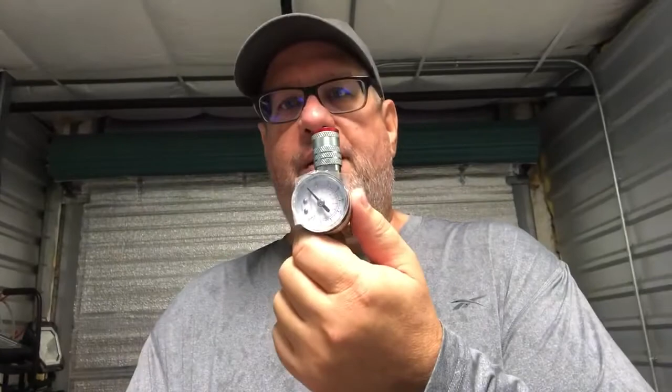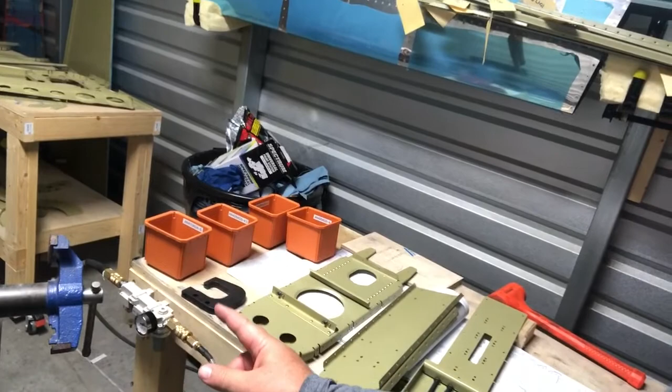I've got a sinking suspicion that the gauges on my bench, and these guys down there, you guys get the drift, aren't working correctly. So I'm gonna calibrate some things here before I continue. These pneumatics should go no more than 90 pounds of pressure. The squeezers have leather seals, and if pressure's above that, you'll blow those seals. It's just too much pressure. So I'm going to get that dialed in correctly, and then we'll go from there.

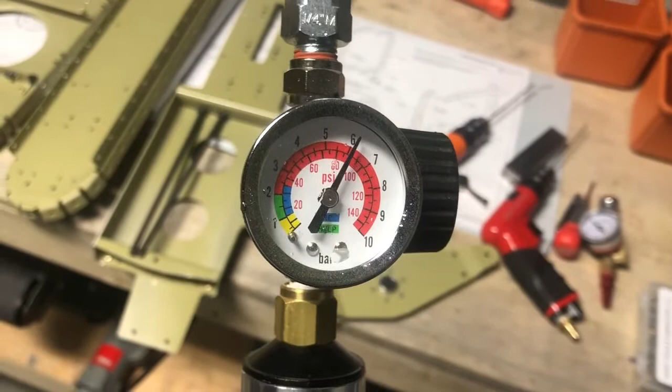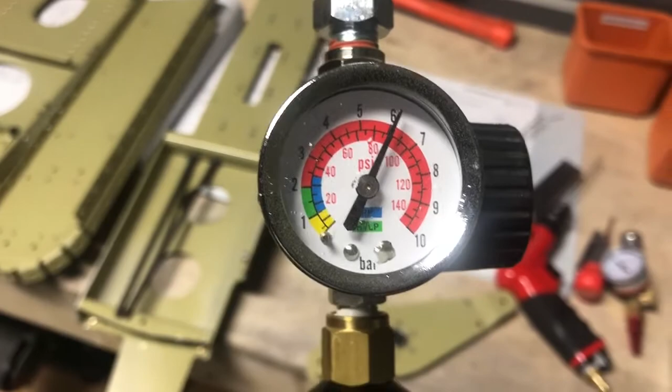So as I suspected - well, actually I didn't suspect, I gotta get this right - the gauge on the compressor is actually lining up right with my gauge here, 90 and 90. So I don't know what is going on. What I'm going to do is plug this into the regulator here and see what we get there. But yeah, these are lining up, they're calibrated. I trust this gauge here a lot more than any other gauge. This is a nice one, very precise.

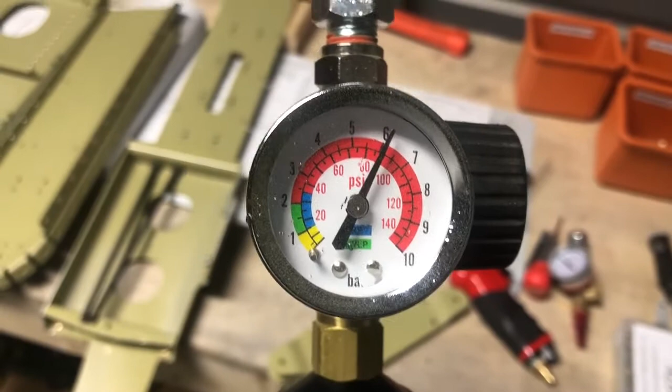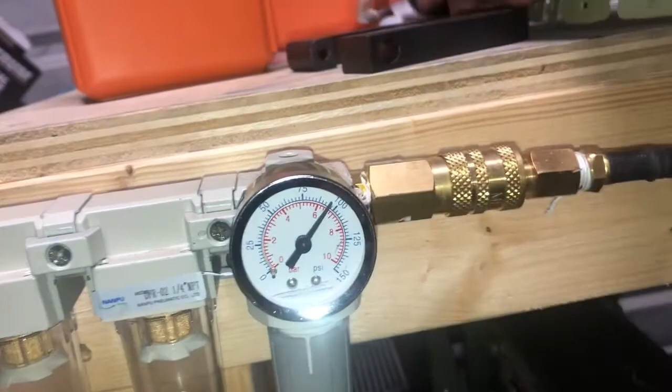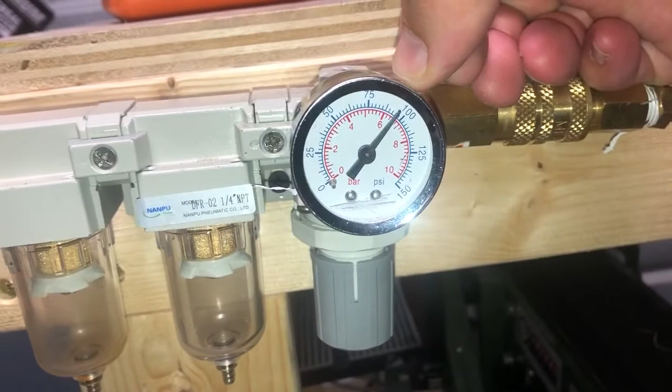So let me put it onto the bench and calibrate those as well. As I suspected, this gauge reads 90 here, and I trust this one. So this other gauge is about 2 to 3 pounds off. Not bad, actually I was shocked. So I'm now trying to figure out what the heck - this gauge is reading about 2 to 3 pounds of pressure high. Different line, comes out of a different side of the compressor. So let me disconnect this.

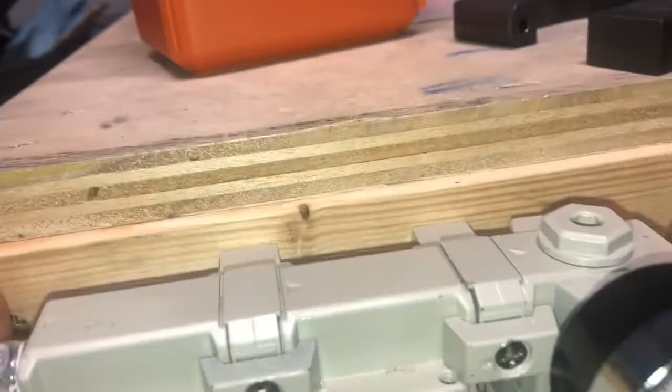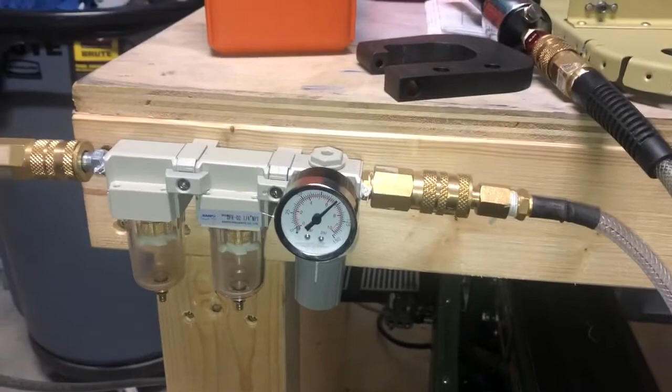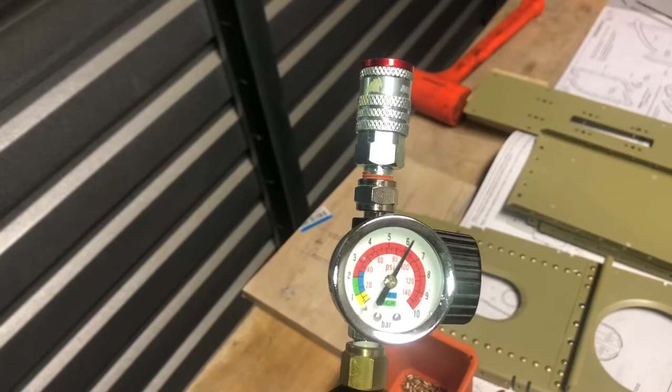Let me disconnect it and hook the gauge up to it and see what we're reading. Yeah, we're dead on this one as well. So these gauges are reading about 5 pounds of pressure high, which I don't get. I don't understand why I was over pressuring, because the settings were set to 90 pounds. Don't know, maybe atmosphere, all us pilots out there. I doubt it because it's a closed system. So it's really bizarre that I was shearing those pins like that.

What I'm going to do is keep this gauge hooked up to one of these lines. I got an air leak too, I got to fix that. I got 2 lines that feed into this room, so I'm going to keep this gauge hooked up and see if the pressure increases or decreases when the system runs. It might overpressure, I don't know. But I'm going to keep this hooked up and monitor it, and I'll let you go.

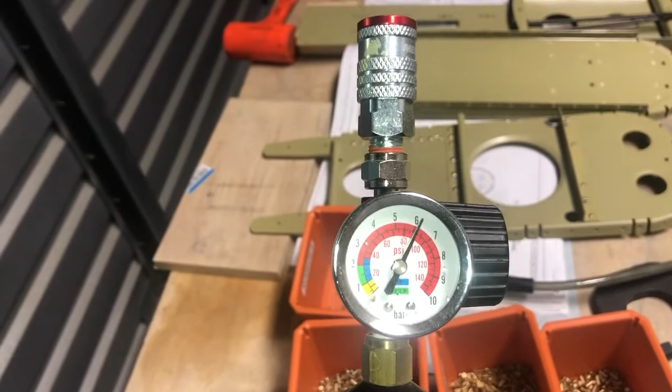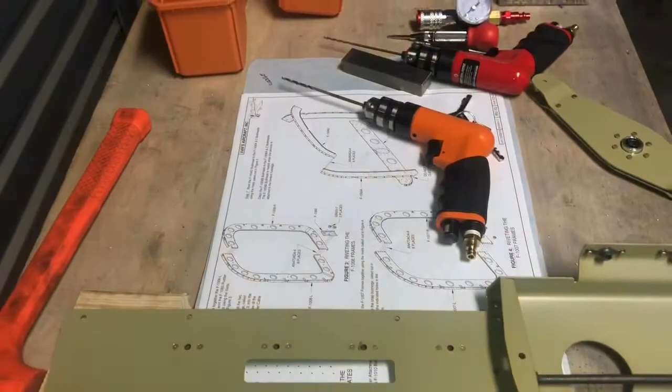But it's very important that you get your pressures right. You do not want to go over 90 pounds of pressure on these tools unless they're rated for that, but most tools are 90 pounds max. So we're going to continue on. Like I said, I've got to get the rest of the bulkheads riveted together, and then we'll soldier on, do what we got to do.

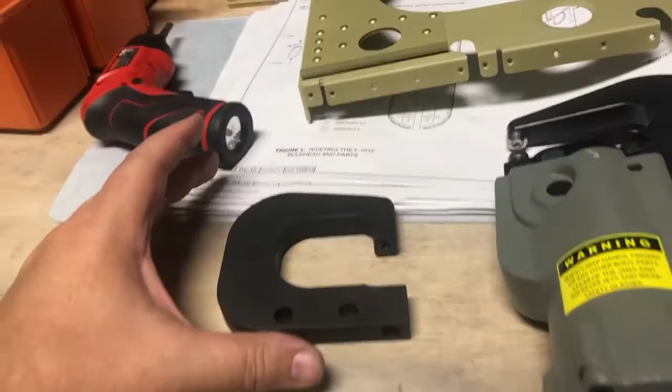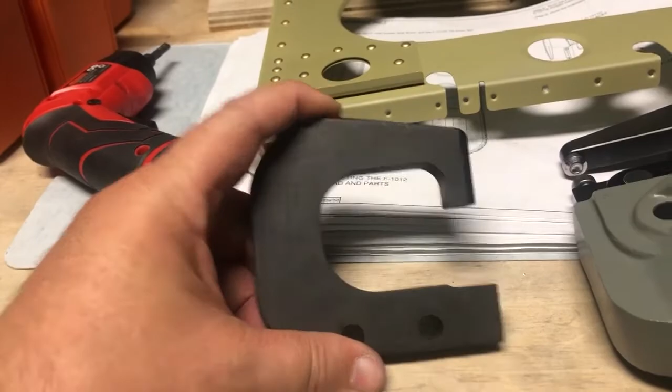All right, so I got this riveted together and everything looks great. Now I will have to tell you, I don't know how you could use the pneumatic squeezer unless you had the longeron or this type of yoke in the system that allows you to get around the angles. This straight yoke won't get around these angles, especially this bar here. So you might be able to do it, but I couldn't figure it out, so I just switched to the yoke.

I would tell you, and I've said this time and time again, if you don't have this in your toolbox for your squeezers, you need to get one. It's gonna make your life a lot easier. It's a 4-10, I got it from Cleveland, I believe, Cleveland Tool. They have them. You definitely need it - I have pretty much every yoke you can get, and I can tell you this one is just as valuable to me as this guy.

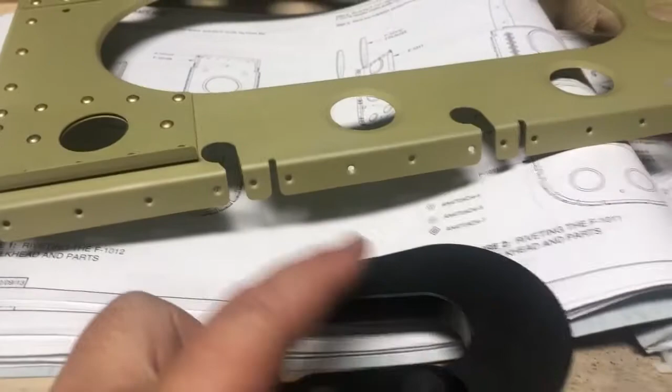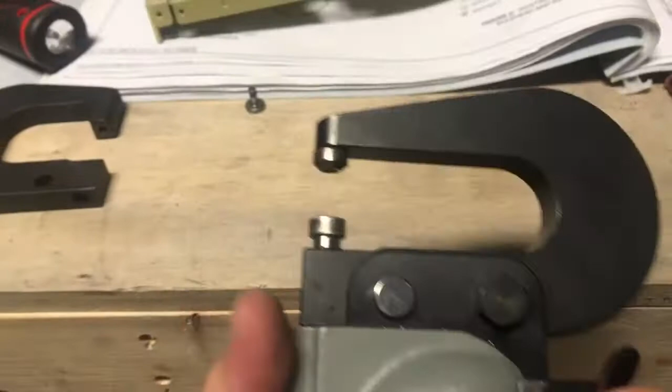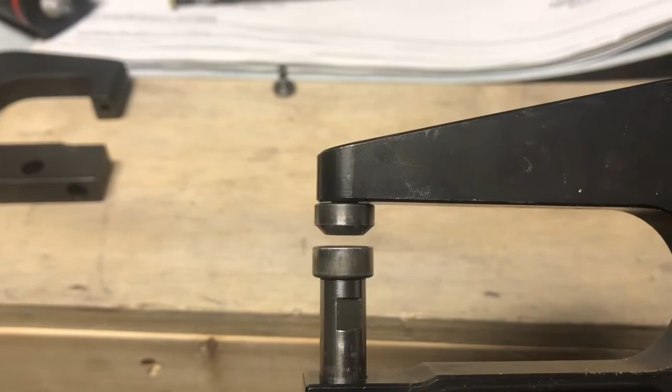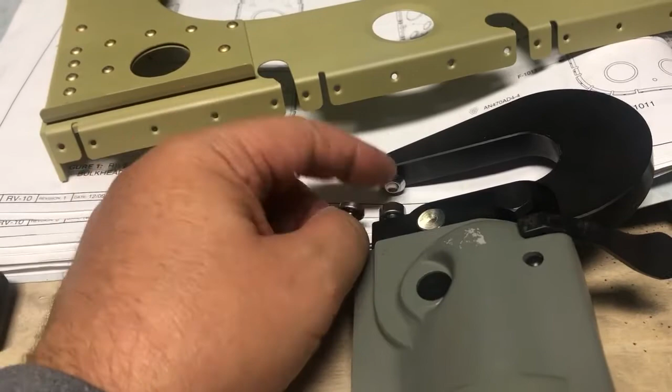The other thing you're gonna need is on your sets, you're gonna need a thin set and also a thicker set to get your gapping or your squeezing just right. I know a lot of people, when they use these squeezers and it's not squeezing enough, their first inclination is to tighten this down or reduce that gap so it squeezes more. But the problem is the squeezers have a power stroke, and once you go past that power stroke, it's not gonna have enough power to squeeze the rivet. So you're gonna have to adjust it by using either a longer one, which gives you a little bit more into the stroke, or less of the stroke.

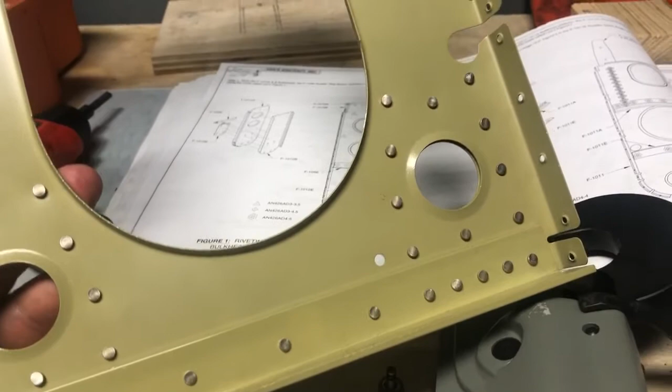So you're gonna need another one of these, I found. Other than that, this is pretty straightforward. Got everything in there. Once again, I gotta caution you, you are going from different material thicknesses, so you're going to have to adjust your squeezer accordingly. Just because it squeezes this guy doesn't mean it's gonna squeeze this guy, right? It's different material.

So what I typically do when I first start squeezing or using a pneumatic squeezer, I will set it to a point to where I know it's not gonna over squeeze. I know it's not, and then I work into it. Now, the more you squeeze a rivet, the harder it will become, so I typically do no more than 3 times. I squeeze it, test it, squeeze it, test it, squeeze it. If I still don't have the pneumatic squeezer set correctly, I go on to the next rivet and get that one set, then I'll go back to the last one. But the more you squeeze the rivet, the harder it's gonna get. So I would do no more than 3 times, and the 3rd time will be the charm.

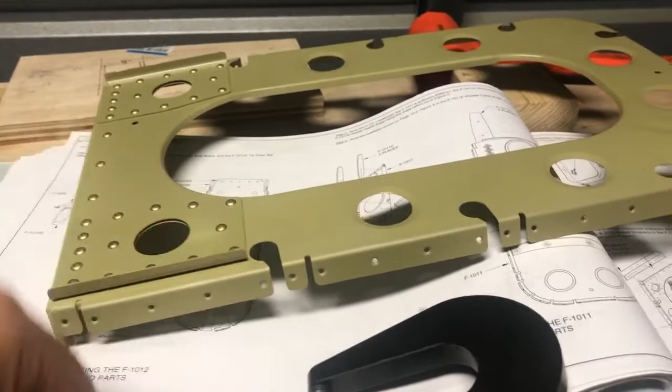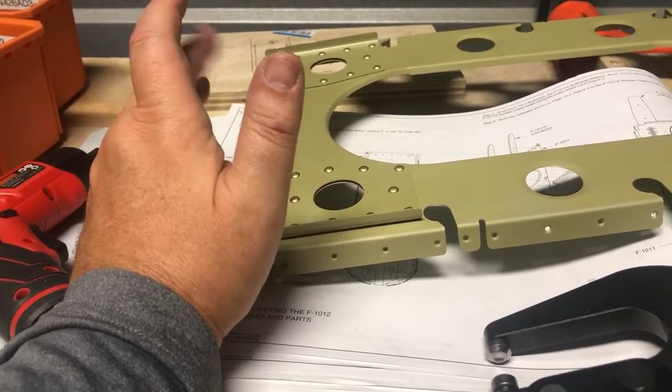If you guys, like I said, I will squeeze one - this is when I'm first getting my dimensions and checking it with my gauge. I squeeze it, I turn it, I'll squeeze it again. And if it's still too small, or if the rivet head is too small, it goes through this gauge, then I'll turn it again and squeeze it. At that point, if it's still too small, I'll just go on to the next rivet and continue adjusting my gun. Then once I have my gun adjusted, I'll go back to that rivet and do a final squeeze on it, the 4 times. Any more than that, you're gonna harden the rivet and make it harder and harder. So those are just some things about that. So we got this done.

Now we've got to do the bulkheads, and yeah, we might get to the skins. I don't know if you guys can hear it out there, but it's raining pretty good. But I might be able to get over to Harbor Freight.

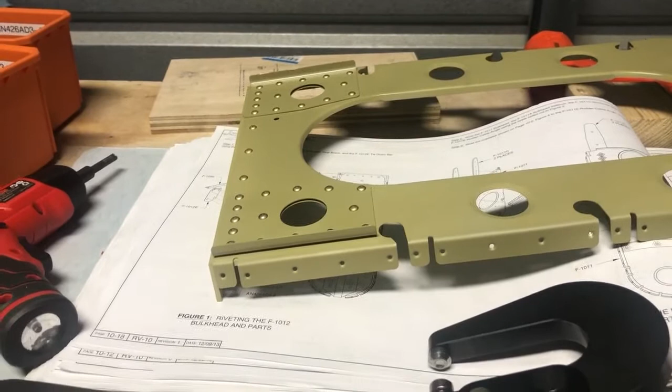They have some adjustable stands, so I might get over there and get those in here. I got these from Harbor Freight, the cheap ones. They're about good, the only thing they're good for is sitting there in the corner. Well, I take it back, I did have the rails on them, but that's about it. I mean, they're pretty much useless for anything substantial. If you're just going to set something on them, that's fine, but no weight. They're not adjustable, so I'm going to go get the adjustable ones at Harbor Freight, so I can adjust the height as I put it together.

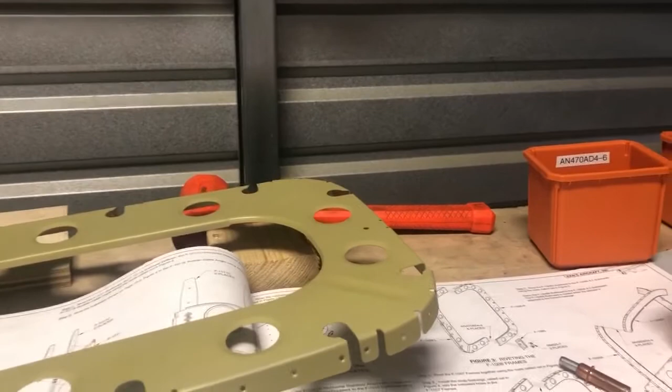So all right, another piece down. I've got 3 more bulkheads to assemble, and then once those are done, we'll clean up and think about starting to put the tail cone together. So be back in a bit.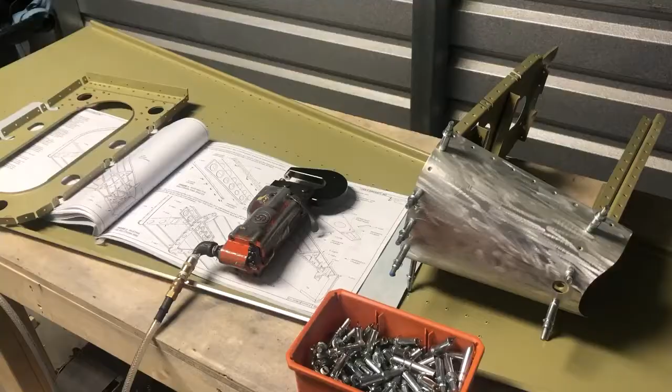All right YouTube, so here we go. We're starting to put things together. Yeah, I got the frame together. We're starting to put pieces. I really need to go get those sawhorses, because we have to hang all these bulkheads, and now they've got a lot of mass on them.

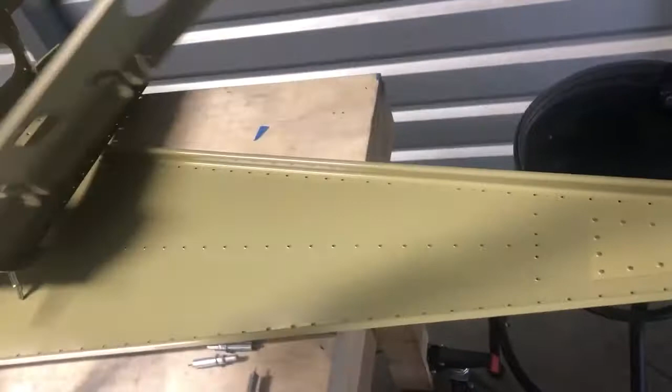If we put them in here, they'll torque out if we try to do them this way. So it's better to hang it and let gravity do its thing, until we can get the rails locked in and everything to hold the frame together. So I really need to have those sawhorses.

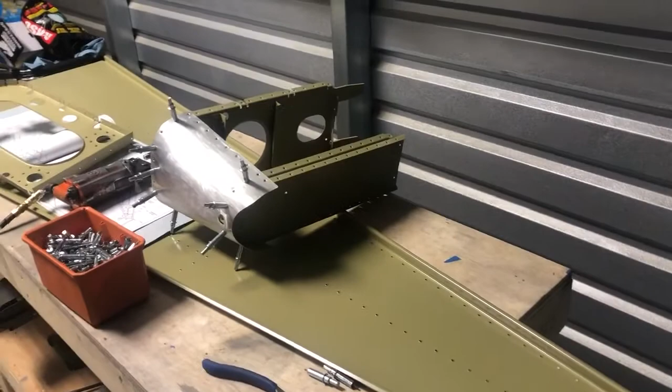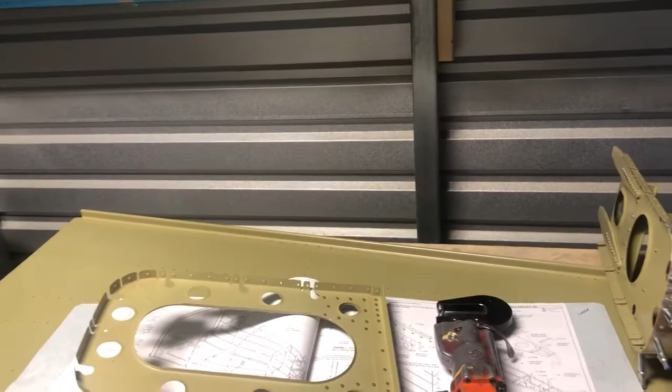I fought with this when I put it together. Oh, I did get the stiffener plate in. I really did fight with these when I was originally putting it together, and I'm not going to go through that again. So I'm going to call it a day, we got a good 4 hours into the shop today.

So I'm going to spend some time with Miss Sandy. We still got some remodeling to do, got to go get some tile and stuff, so I'm going to get out of here and get that done, then come back tomorrow. Got to go to Lowe's anyways, or a box store, and get those sawhorses, so I can get the tile and my sawhorses.

So yeah, we got a lot done in the shop, but like I said, there's no reason to force it. It's the journey, not the destination that matters. Now of course the destination will be awesome, but it's the journey. So we want to do this right.

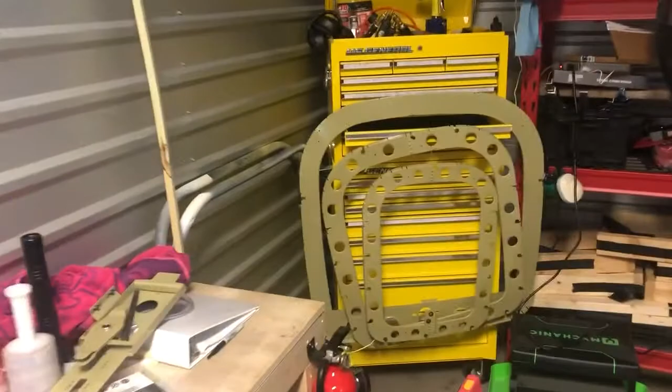One thing I will do is hang those, I just pulled out the drawer to hang them. These are kind of, well, they're flimsy, it is what it is, it's thin gauge aluminum. So you want to hang them after you get them assembled. Laying them on a bench, they might get creased, or something might bend them. So I just hung them, you guys see how I did that.

Yeah, that's about it, that's all I had for you guys today. Another great day in the shop.

Gosh, I got to tell you, I love building. I really do. I love flying, but I love building. Building these airplanes is awesome. I think I can get into this, I could retire, this could be my retirement gig, right? Builder assist and everything. So yeah, enough of that, I'm just rambling.

I just want to say, God bless you, God bless your family. Please pray for peace, and pray for those poor people in Ukraine. I wish we could do more. Well, I'll leave the politics out of it, but you're either on the right side or the wrong side, so pick a side. But may God bless those people, especially the children and everybody over there, not just children, everybody. So as you guys are sitting at home, be grateful for what you have instead of what you don't have or what you want.